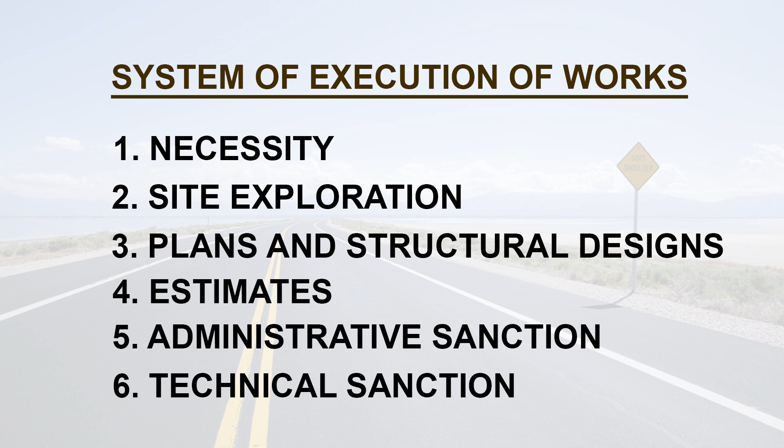Based on the estimates, government will give administrative sanction. After getting the administrative sanction, the department head, depending upon their powers, gives technical sanction. After technical sanction, all works go for the tendering process. After tendering, contractors are assigned and an agreement is concluded with the contractor, and the site is handed over to the contractor for executing the work.

During execution, the field engineers are involved, and after completing the work, it will be handed over to the department, the concerned departments. That is the total process of execution of works in the department.

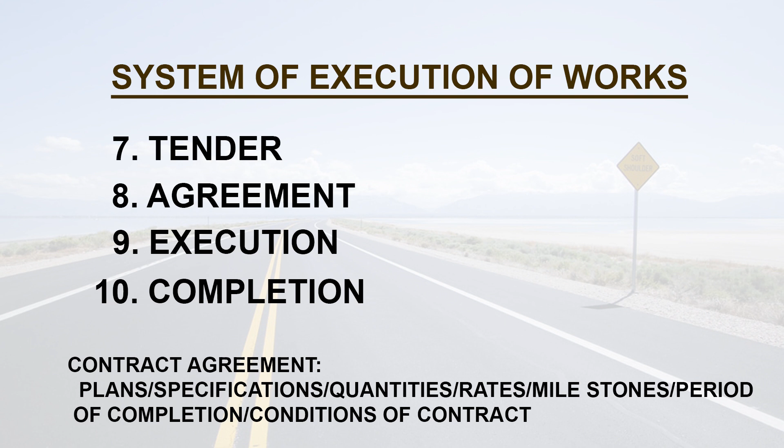While giving the contract to the contractor, the agreement usually consists of plans, specifications, quantities, rates, milestones, period of completion, and conditions of contract. All these things become a document in the contract agreement.

The R&B department usually executes roads, buildings and bridges. In our department, we have different types of roads depending upon their importance: national highways, which connect interstates for interstate movement; state highways, which are inter-district roads; major district roads within the district towns; and rural roads, where connectivity is between villages.

We also have other types of roads based on the materials used: cement concrete roads, blacktop roads, metalled roads, and unmetalled roads. Based on lane width, we have single lane, that is 3.75 meters to 7 meters; double lane, 7 meters to 10.5 meters; and multi-lane, 10.5 meters and above.

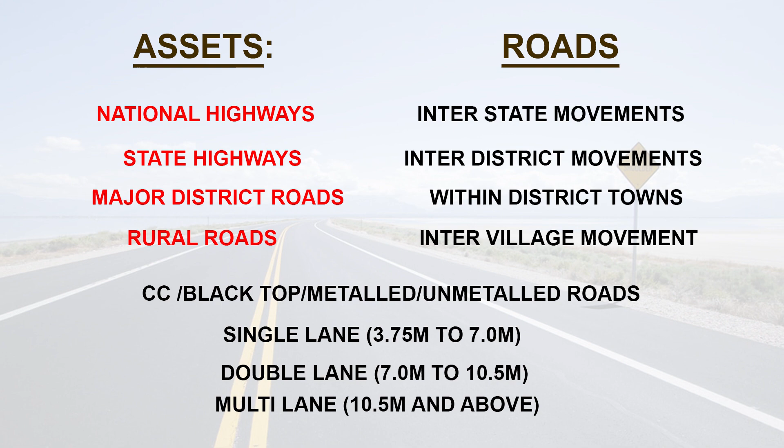Now we can see the cross section here of a flexible pavement. The flexible pavement consists of embankment at the bottom, then subgrade 500 mm thick, then subbase, above the subbase the base, and above the base the wearing course. You can see in the slide the total roadway width and carriageway width, treated shoulders, and earthen shoulders - all these are part of the flexible pavement.

Usually the base course will be 225 to 300 mm of WBM or WMM, that is waterbound macadam or wet mix macadam. Compaction is very important in road formation most of the time. The bottom layer embankment should be compacted to 95% of the dry density. The subgrade above that should be compacted to a minimum of 97% of dry density. Then the subbase is compacted to 98% of the dry density.

Above this subbase there is a base course, and above the base course a binder course will be there. The binder course usually consists of bituminous macadam, bituminous concrete, or semi-dense bituminous concrete, and above that the wearing course. Between the wearing course and binder course there will be a tack coat, and between the binder course and base course there will be a prime coat.

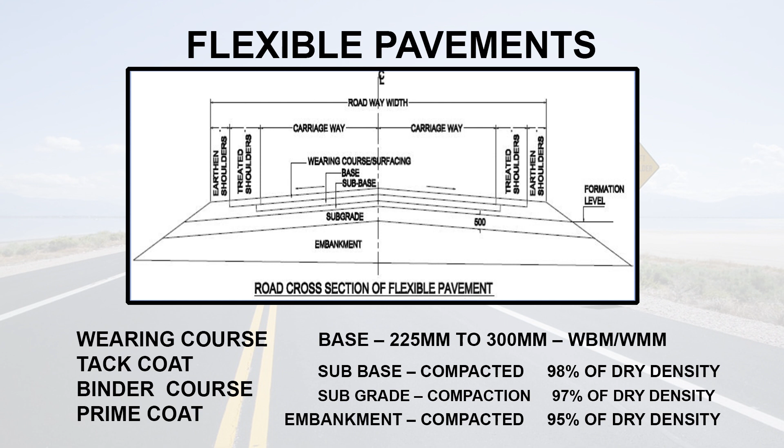This is about flexible pavement construction. While constructing flexible pavements, most of the time importance should be given to compaction. If the compaction is very good, the life of the road will be very good.

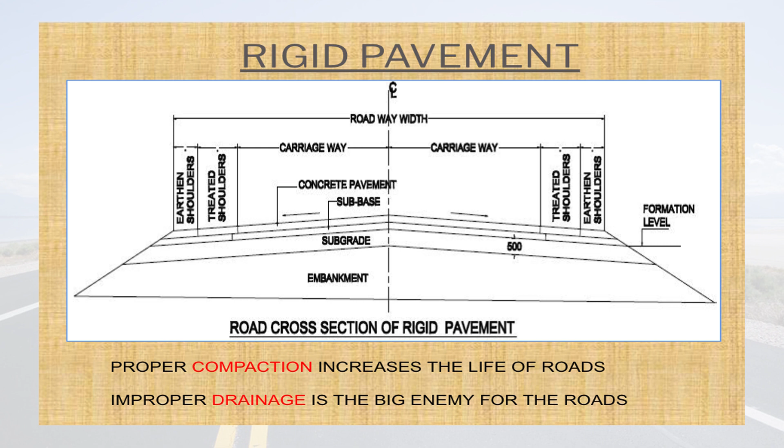Then rigid pavement - rigid pavement is nothing but cement concrete pavement. In cement concrete pavement, this base layer is missing; all other things remain the same. Instead of the base layer, we will have lean concrete, then the concrete pavement. In cement concrete pavements too, compaction is very important, which improves or increases the life of the roads.

One more important aspect to see while executing is drainage. Proper drainage is very important. If the road is not properly drained, the water stored on the roads due to irregular drainage provisions will spoil the road within a short period.

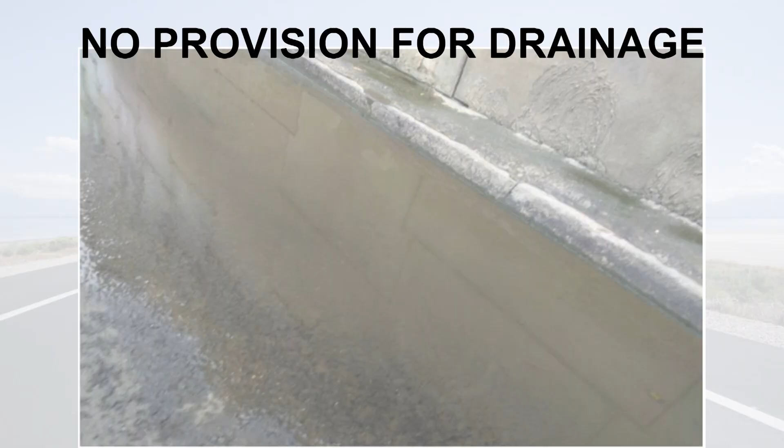For example, we can see in this slide a road that was executed very recently, within 3 to 4 months of laying. You can see how water is stagnated because of no drainage system in the road. This should not happen in our roads. As upcoming engineers who joined the department very recently, you can spot this type of pocket on roads in your jurisdiction and bring those points to the notice of your immediate engineers.

If the length of the structure is less than 6 meters, we will call it a culvert. In culverts again, we will have pipe culvert, slab culvert, box culvert. Pipe culvert means we will use NP3 or NP4 Hume pipes. In slab culvert, we will use RCC slabs, and in box culvert, RCC again with walls, slab and base; everything is interconnected and will form a box.

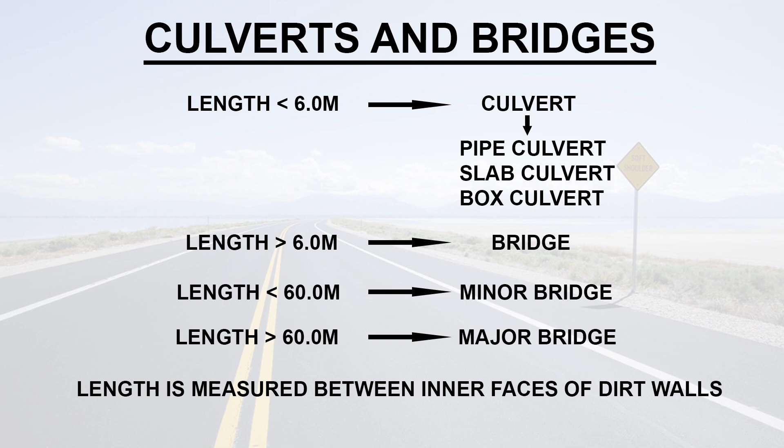Then if the length of the structure is more than 6 meters, we will call it a bridge, and if the length is less than or equal to 60 meters, we will call it a minor bridge. If the length is more than 60 meters, we will call it a major bridge. Length here is measured between inner faces of dirt walls.

In the next slide, you can see the details of a bridge. Here in this slide, we have one pier and 2 abutments, and the superstructure is shown in pink color. The length between 2 dirt walls is called the length of the bridge.

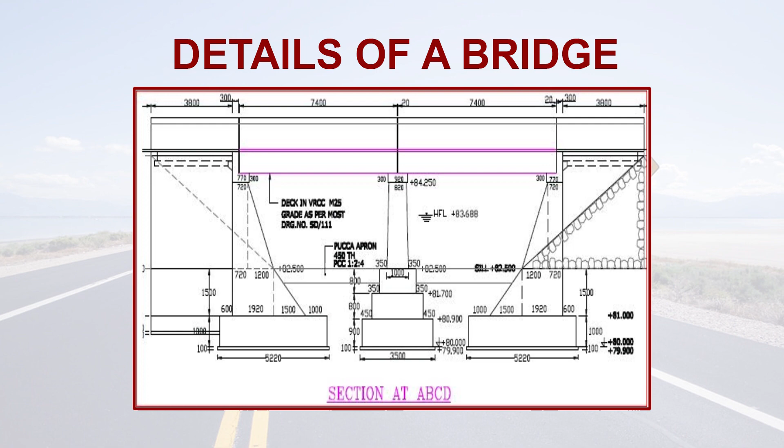Bridges may be further classified as high level bridge, low level bridge, submersible bridge, causeway, based on the RCL fixation. HFL is high flood level, OFL is ordinary flood level. If the bridge RCL is above HFL with some vertical clearance, then we call it a high level bridge. In a low level bridge, no vertical clearance will be provided.

In a submersible bridge, the bridge is constructed with RCL just at the level of OFL, so that when HFL comes, water flows above the bridge, and it is called a submersible bridge. And in a causeway, water flows above it all through the rainy season; in summer and other seasons it is exposed and you can pass over the path.

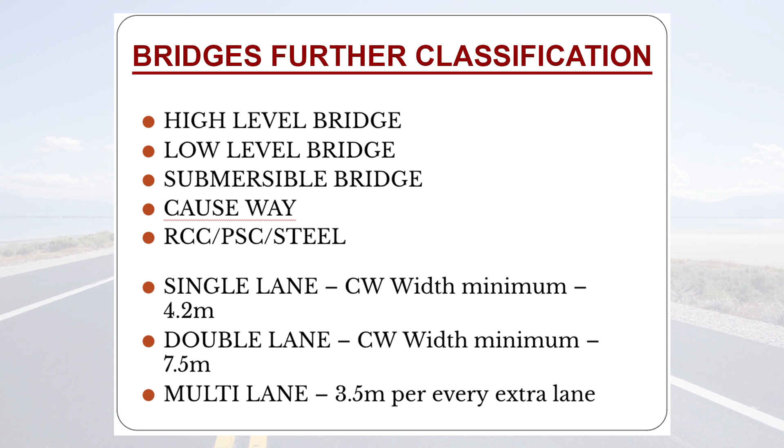Then based on material: RCC bridge, prestressed concrete bridge, steel bridge. Again, based on lane width, bridges are classified as single lane bridge, double lane bridge, multi lane bridge. In a single lane bridge, carriageway width is a minimum of 4.2 meters. In a double lane bridge, carriageway width is a minimum of 7.5 meters. And in a multi lane bridge, for every extra lane we have to provide more.

Then important points we have to take care of in construction of bridges: MFL. MFL is nothing but maximum flood level, which is usually considered for a 50 year recurrence. In 50 years, what is the maximum flood level? That is considered the maximum flood level. Ordinary flood level: every year during rainy season there will be a flood level, usually called the ordinary flood level.

Then linear waterway. The waterway required after construction of the bridge to pass the water under the bridge is called linear waterway. Then normal or skew crossing: whether the bridge is crossing the river at a right angle or at some angle. With some angle, it is called skew angle.

Then foundation level. It is a very important aspect in construction of bridges. The foundation level should be fixed below the scouring level of the stream. Scouring level will be calculated in the design offices, but during execution you should take care that the foundation level is properly placed. If there is any difference between the drawings and your site, it should be reported immediately, otherwise there is a problem of collapse of the structure.

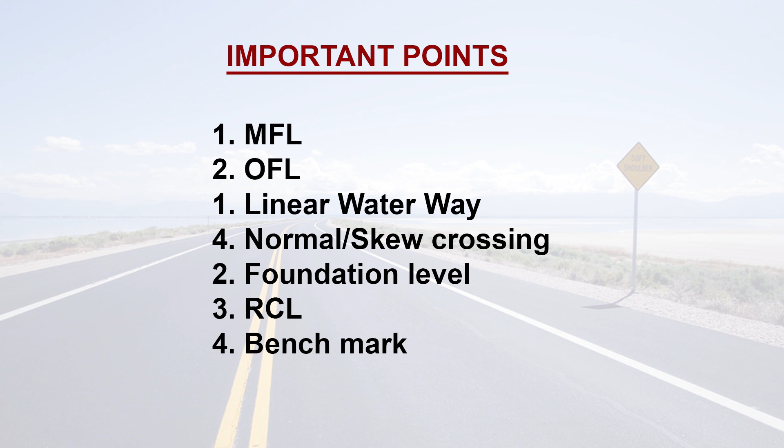Then benchmark. During the survey, some temporary or permanent benchmark should be established near the site. That level should be marked and reference to that benchmark shall be mentioned in the drawings, because later after approval, if you don't have the benchmark, you cannot fix the level. The design office will give one level, during execution you may fix some other level, which is very difficult to match. So therefore the benchmark is very, very important and it should be fixed properly.

Then you see one problem, scaffolding and shuttering. This is a very important aspect in construction of bridges. You see here on the left side one slide: because of improper scaffolding, only casuarina ballis were taken, and they were also not properly fixed.

Before laying the slab itself, the formwork and centering completely collapsed, and there was a lot of loss to property as well as human life sometimes. Sometimes time is also very important for us. The right side slide shows the slab beams were executed, then the shuttering and scaffolding completely collapsed due to heavy rains. Here also it is a scaffolding failure.

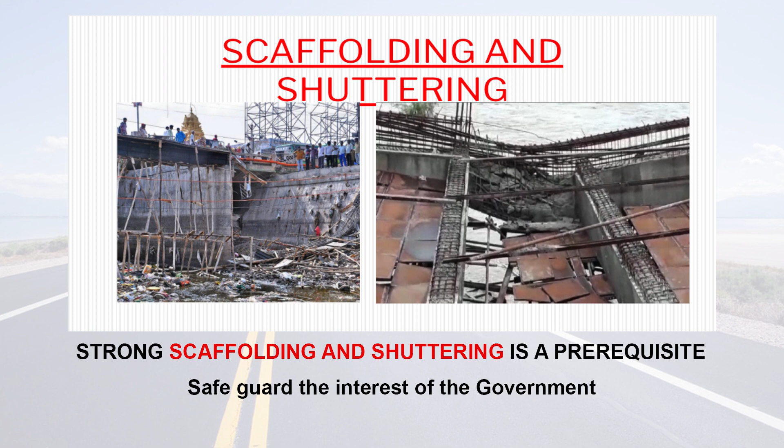So therefore it is very important that the scaffolding is taken care of before laying the slab, and it should be cross tied properly. The materials used should be properly taken care of. Strong scaffolding and shuttering is a prerequisite for any construction. If you take care of scaffolding, you are safeguarding the interest of the government. Safeguarding the interest of the government means safeguarding the interest of the people and saving the money of the government. That is one important aspect you people can do in the field.

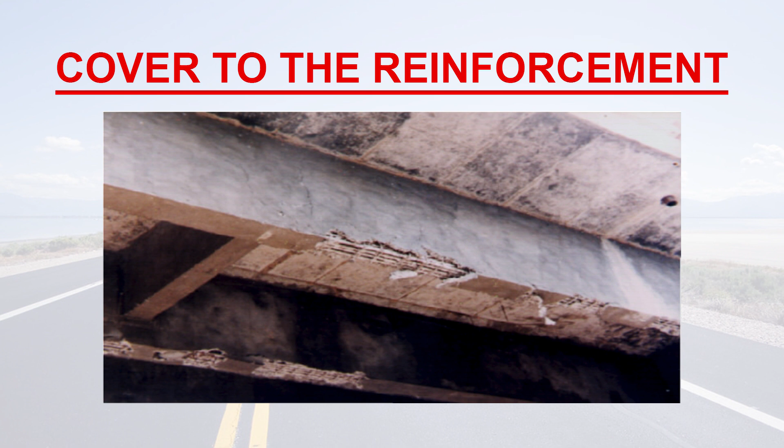Then this is one bridge where you see how the reinforcement is exposed from the bottom of the beam. Cover to the reinforcement is very important. Here the cover is not properly maintained, hence the steel is exposed and the bridge is not fit for passage of traffic. So all of you should take care of cover at the time of execution of the work.

Then spacing of reinforcement. We have all studied in college the vertical spacing and horizontal spacing between the bars. What is the minimum spacing? We know that metal size plus 5 mm is one aspect, and the diameter of the rod is another aspect. Out of these two, whichever is greater, we have to provide that value.

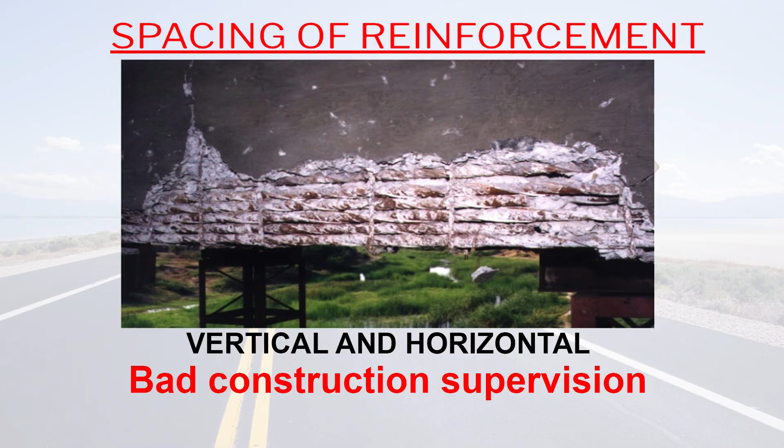But in this slide, you observe the rods were placed adjacent to each other and they are not allowing any concrete to flow in between, so it is defective concrete and a defective structure. After completion of the structure, it is very difficult to rectify this, and a lot of property is lost. Take care in the field that this type of thing does not happen in your jurisdiction. It's very bad construction supervision. Please take care of minimum spacing between the rods.

Then another aspect is compaction. If you have good compaction, you will get good concrete quality. For compaction, we generally use vibration, needle vibrators, pan vibrators, and sometimes ramming also. So you should take care of proper compaction.

Then in the field, usually we make some cubes for testing whether we have achieved good quality concrete or not. 150 by 150 by 150 size cubes are cast from the concrete which is used on the site. These cubes shall be filled in 3 layers. Each layer is to be compacted with 25 strokes of a 16 mm dia, 600 mm long, bullet pointed round steel rod. Usually you may use the HYSD rod pieces available in the field.

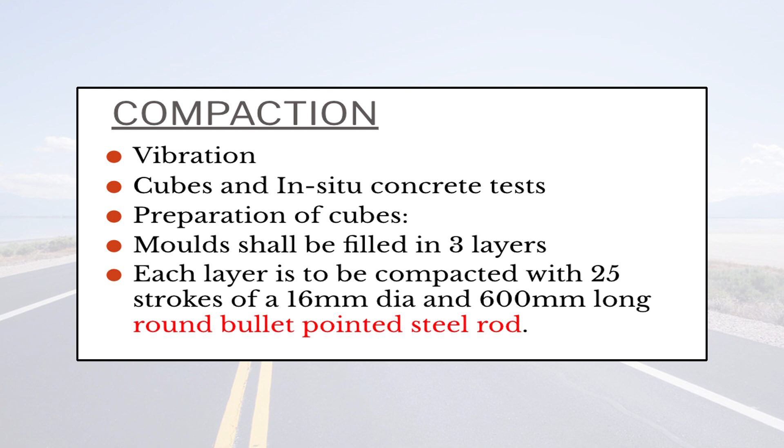If you do like that, you may not achieve cube strength properly, and when vigilance or quality control people visit the site, they may take some of the cubes for testing in their labs. If the strength is not achieved in their labs, you have executed poor quality concrete on the site. That means if cubes are not properly cast, the total structure will be in a dangerous situation. Even though the concrete quality used in the structure is good, if your cubes do not give proper strength, it will be difficult to explain at a later date.

Again, you have to do in situ tests like the rebound hammer test or pulse velocity test. Then durability of the concrete. Factors that influence durability of concrete include the environment where our structure is located, whether it is an industrial environment or coastal environment. Then cover to the embedded steel. In earlier slides we have seen that cover is very important. If you maintain proper cover, you will get good quality concrete and good life for the structure.

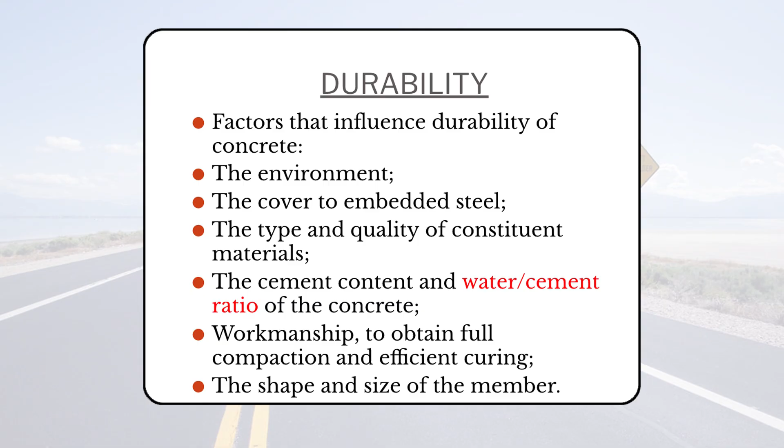The type and quality of constituent materials. Constituent materials in concrete are steel, cement, sand, and metal. All these materials should be of good quality. The steel used should not be corroded, and it should be protected from corrosion. Sand should be free from dirt and silt, and metal should be strong HBG metal.

Then water is also very important. You should not use water from saline areas. It should be potable drinking water only. If water is not good, even though you spend crores of money, it is a waste. The life of the structure will come down, and it may fall within 4 or 5 years' time. You may lose the total value of the structure.

Then the most important thing is cement content and water cement ratio. Water cement ratio is a very important thing which we have to see in the field. If the water cement ratio is between 0.4 and 0.5, it is okay; you will get good quality strength. If you cross 0.5, from 0.5 to 0.6, there is a drastic change in compressive strength of the cubes or concrete. So you maintain a good water cement ratio as suggested by the mix design.

Then workmanship to obtain full compaction and efficient curing. Curing is also very important. Most of the times you notice that columns or slabs are not properly cured at the site, because the executive staff may be having so many works on the site, they could not concentrate on that. But because you people joined now in the departments, you have less jurisdiction and you can attend all these things. Each and every work you know very well, and you can insist on better curing and better compaction.

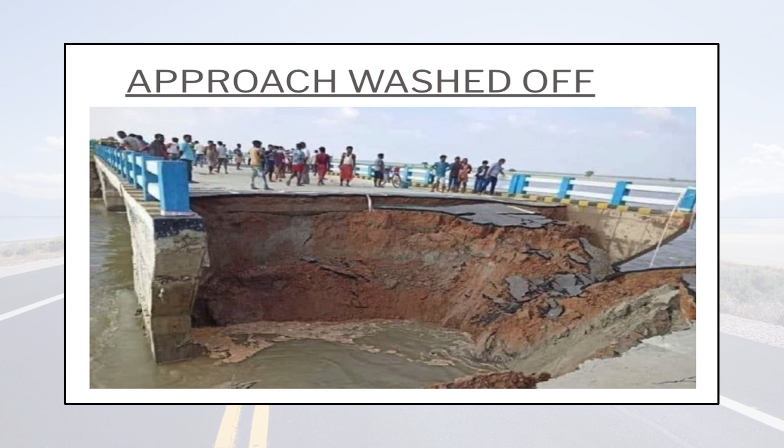This is because, you can see, the problem is lack of proper fixation of linear waterway, or lack of compaction on the backside of the abutment, or lack of proper protection given to the abutments. All these things field people, or you at the time of execution, can take care of. Then buildings: we have non-residential buildings and residential buildings in our department. Non-residential buildings include judicial courts, and sometimes we are executing stadiums, indoor stadiums, outdoor stadiums. Then other structures, water tanks, check dams and other irrigation structures; all these are very important executions we are doing.

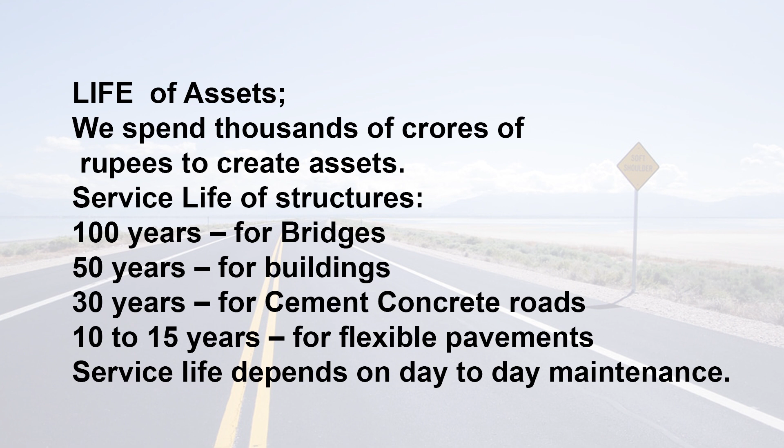Then life of assets: whatever assets we create, they should stand for their whole life. For example, the life of bridges should be 100 years, buildings 50 years, cement concrete roads 30 years, and flexible pavements 10 to 15 years. Many times cement concrete roads are not standing for 30 years; within 4 or 5 years you are finding damages on the roads. It should not happen, because if 30 years is the life, renewals can come down and cost will be reduced.

Then maintenance, what is the requirement of maintenance? It's similar to our human body; we need maintenance, everyday washing, we take food every day. Similarly, the structures also need maintenance to reduce the rate of deterioration. If you don't maintain, it will deteriorate at a faster rate. To prolong the life of road and CD works. Then to reduce vehicle operating costs: if the road is not properly maintained, vehicles passing over the roads will damage the tires, axles, and all those will need repair. Also to provide good riding quality and safety to the road user.

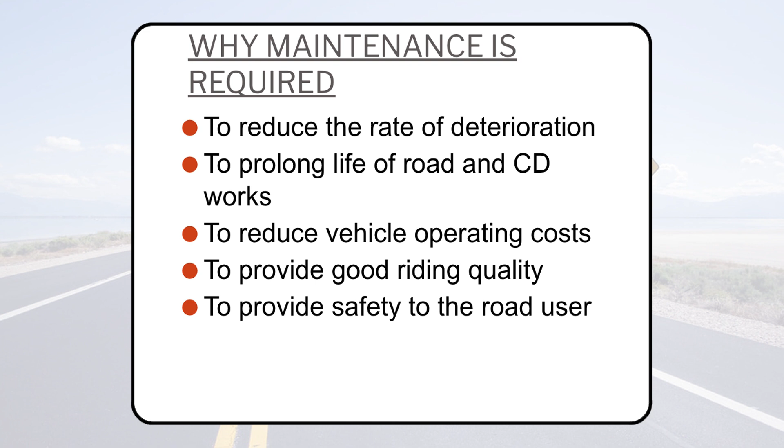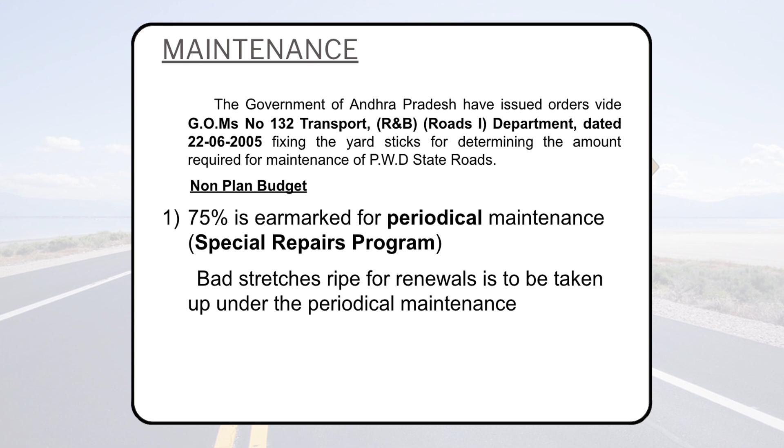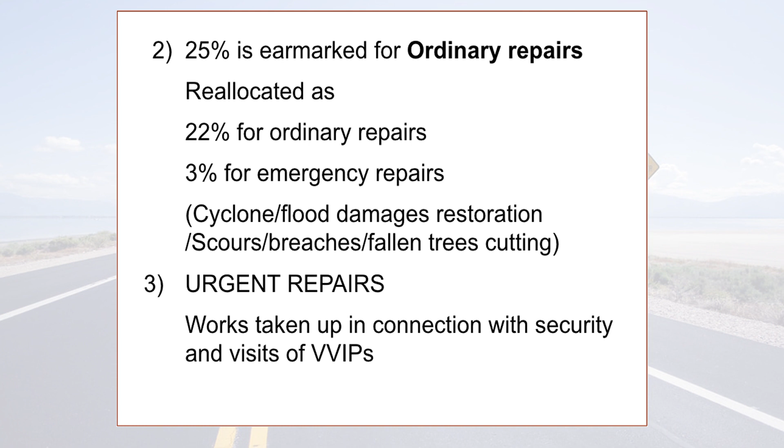For maintenance, the government gave GO 132. According to that GO, 75% of the amount is earmarked for periodical maintenance, that is the special repairs program of the roads. In this, bad stretches which are ripe for renewals are taken up under periodical maintenance, and 25% is earmarked for ordinary repairs, reallocated as 22% for ordinary repairs and 3% for emergency repairs. Emergency repairs are cyclone and flood damage restoration, scours, breaches, fallen tree cutting, and so on. Then sometimes urgent repairs, works taken up in connection with security and visits of VVIPs. The amount will be adjusted between these three.

Then the maintenance schedule in the department: usually by 1st February of every year the maintenance estimates will be prepared, and they will be submitted to the Deputy Executive Engineers by 15th February. Then finalization of estimates by the Executive Engineers by 31st March of every year. Then tender notices by the 1st week of April every year. Then entrustment of work before the 30th.

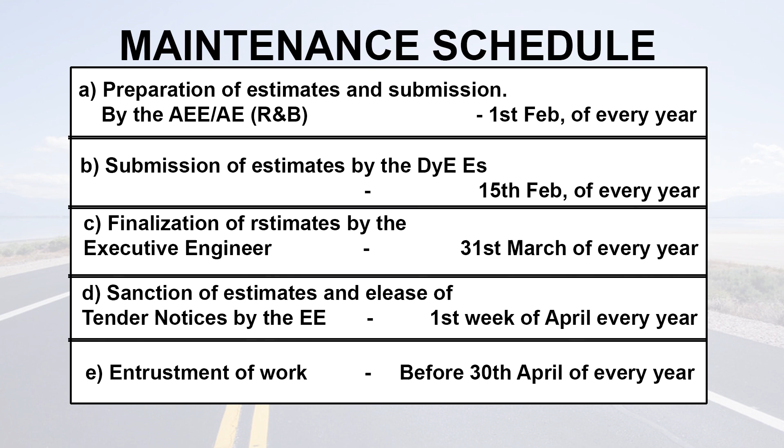Ordinary maintenance works: 22% of the total amount will be spent on this. What we do during ordinary maintenance is pothole repairs, dig out repairs, sunken portion repairs, edge repairs, road edge repairs, scour filling with gravel, side earth, shoulder berm repairs, and vents clearance. Vents clearance means culverts and all those things will be cleared.

Juliflora jungle, shrub, light jungle clearance, clearance of litter and debris, chip concreting to slabs on exposed steel surfaces. Sometimes concrete surfaces have steel exposed, and there we have to relay the concrete layer over it.

Masonry repairs to the body walls, piers, abutments, retaining walls, and parapets. Then plastering to the body walls, piers, abutments, retaining walls, and parapets.

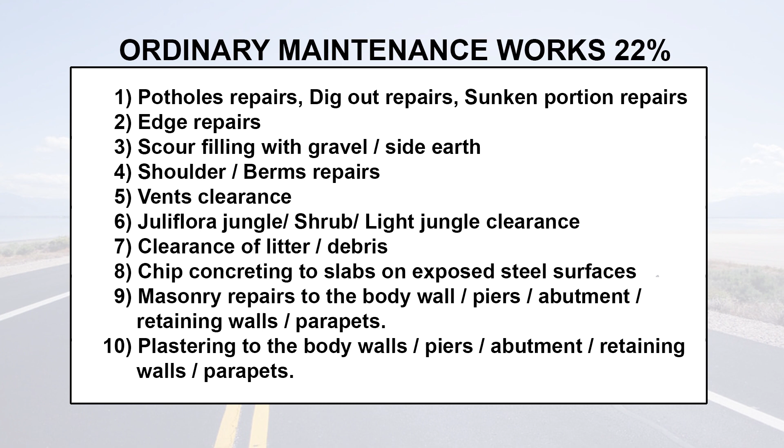Road marking. Sometimes road markings will vanish, and again you have to remark them.

Painting to kilometer and hectometer stones, whitewashing, painting to handrails, guard stones, guide stones of CD works and bridges, and replacement of HM and kilometer stones. Sometimes the stones will be removed by something, then you have to replace them.

Reconstruction of small pipe culverts. Sometimes pipe culverts will be damaged, and you have to reconstruct those pipe culverts.

Sometimes there will not be any rates in the SSRs. In that case, we have to go for unskilled labor engagement for carrying out works of items which have no data, like vents, debris, litter clearance, drain chutes, etc.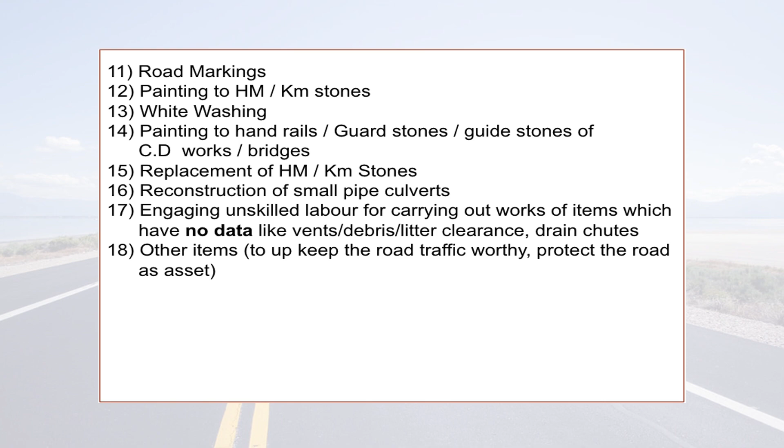Then other items to upkeep the road traffic worthy and protect the road asset. All these items come under ordinary maintenance, and every year this maintenance takes place and roads are put into good traffic worthy condition. That is the process of maintenance.

My dear friends, our Honorable CM has taken up this program, Nadu Nedu, which is a very good program, because all assets which were created earlier are reconditioned now, sometimes recreated also. It is a very good program, an amalgamation of asset creation and asset reconditioning. If we put a little extra effort while creating the asset, we may save nearly 20 to 30%, sometimes 50%, of recurring maintenance expenditure for the whole life of the asset.

If the same program is extended to other departments - now government has taken only school buildings and hospital buildings - if extended to other buildings and departments also, many structures which are in dangerous condition will be given revised life. It's a very good program taken up by the government, and it should be done every year for all departments.

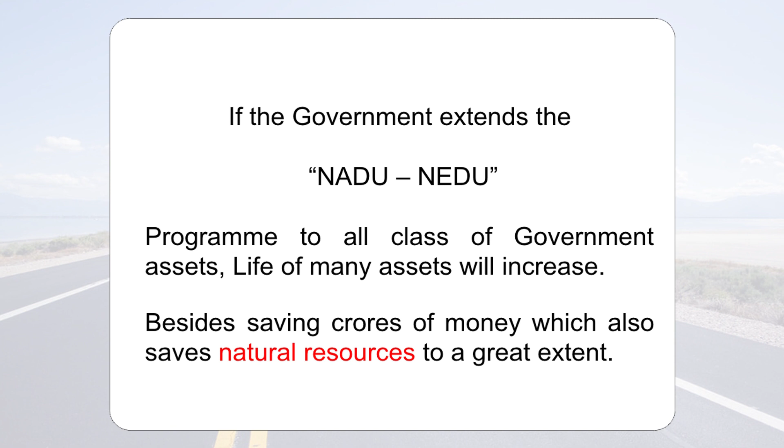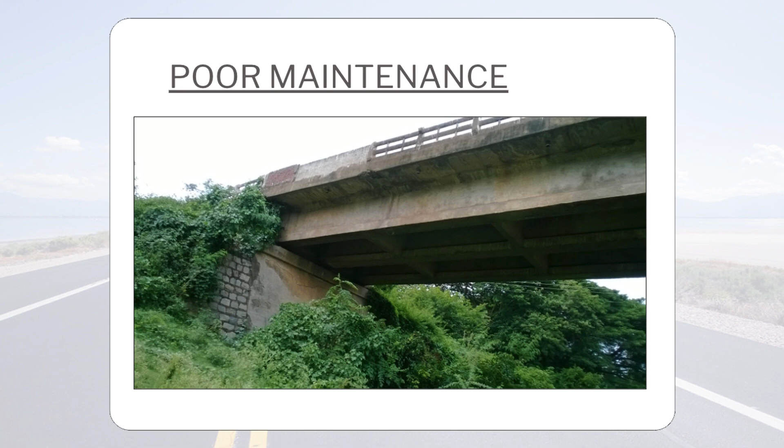This is the maintenance problem of a bridge. See how trees are there around the bridge, and damaged brickwork, plastering, everything. If you do proper maintenance, we can save the life of this bridge.

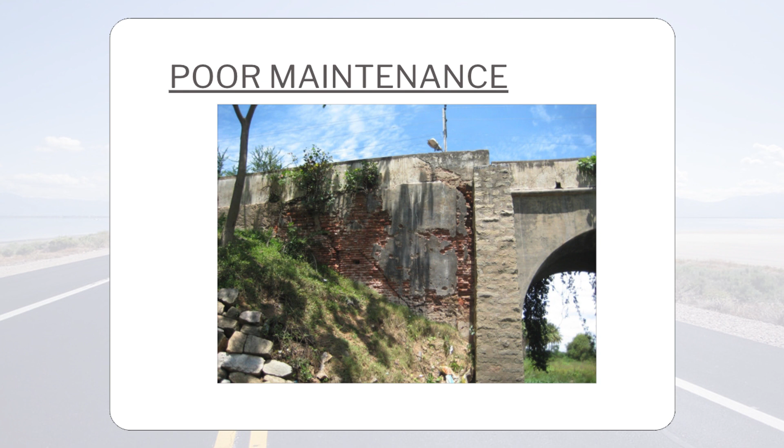Similarly, you see here, the plastering is completely peeled off and a lot of trees and plants are there. This is also poor maintenance and insufficient cover for this bridge. You see, the reinforcement is exposed. If this is identified at the beginning stages, that can be rectified and the life of the structure can be saved - the problem of cover and spacing.

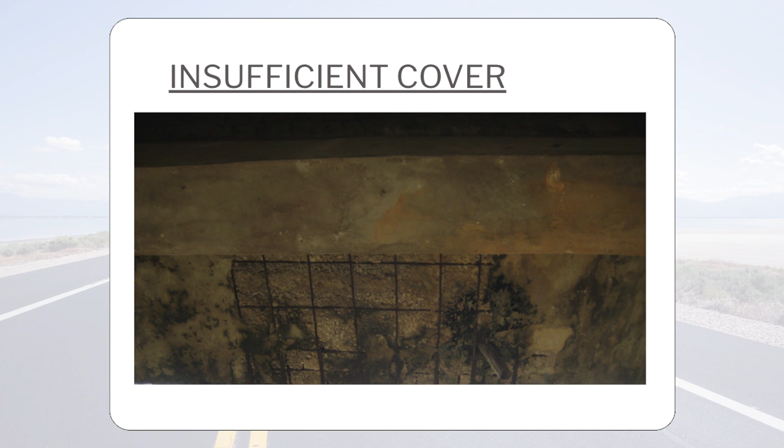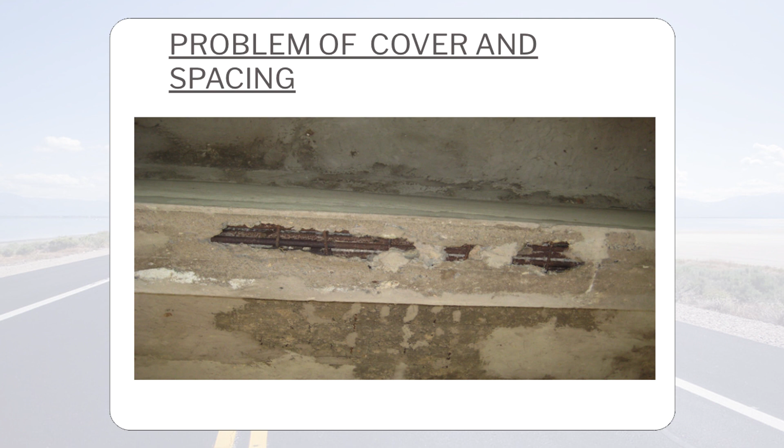As explained earlier, you see the bridge after 2 or 3 years, the steel is completely exposed and the life of the structure is coming down. Then bad workmanship - you see here the bearing, this is a neoprene rubber bearing, above that a concrete beam is resting, but the concrete is not properly cast and steel is exposed. The life of the bridge is coming down.

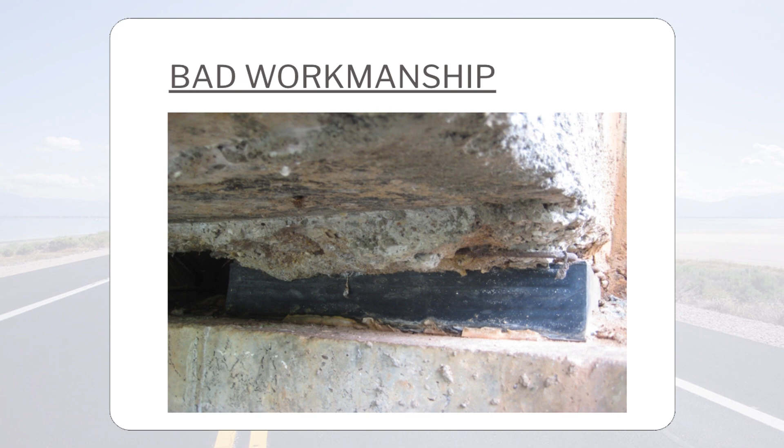All these things, if you find or notice in your surroundings, you may report it to your immediate officers and they can be repaired. At the early stages, if you repair, the life will be improved.

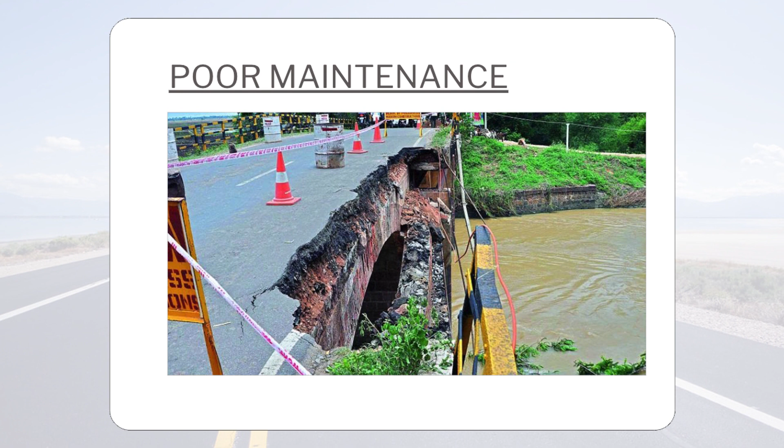In poorly maintained bridges, every year when water flows, it takes some of the soil below from the bed level - that is called scouring. If you are not able to notice where the scouring is, the usual practice is after every flood you have to visit the site and the bridge, and check if there are any ditches near the piers. They should be refilled so that the life will be increased. Otherwise, the bridge will collapse after some time.

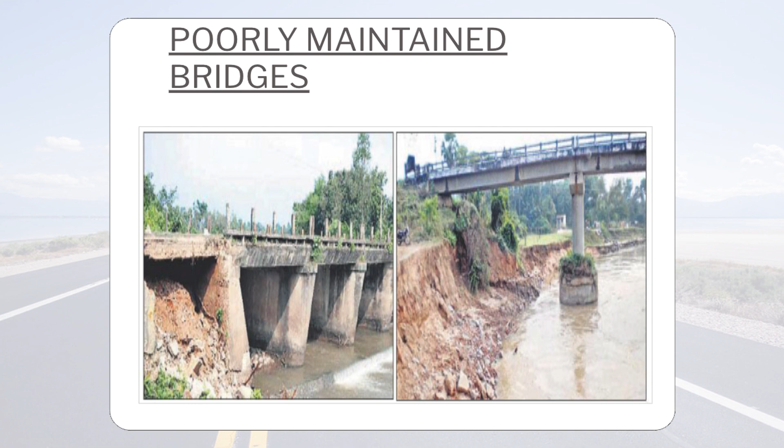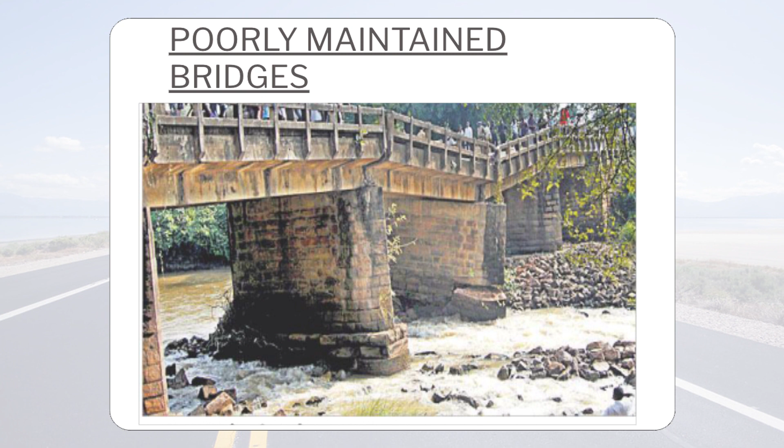You see, this bridge, because of poor maintenance, the pier sank and the bridge collapsed. If it is noticed in the beginning, that can be rectified without any difficulty and the life can be improved. People may lose communication between the two areas. While reconstructing the bridge may take 1 year or sometimes 2 years, so you can avoid all those difficulties for the people.